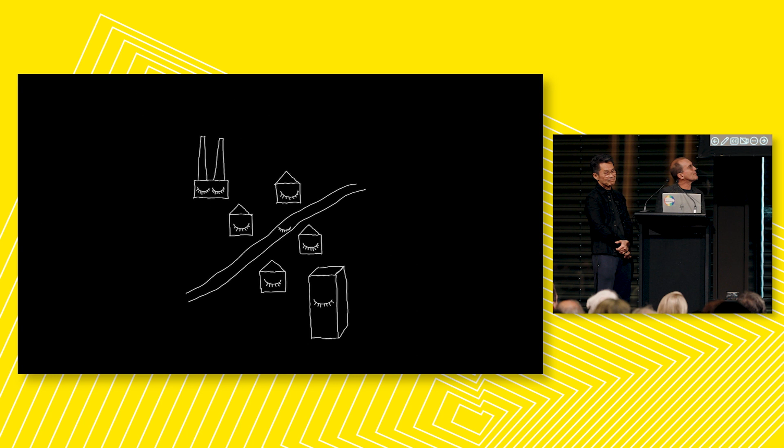So I was trying to do a little sketch, trying to think about what we meant by form follows systems. And so this little cartoon was really that currently we design these beautiful, mainly isolated objects that are really well considered and crafted. But if you imagine an animal in the zoo, it's this amazingly evolved creature, but it's kind of separated.

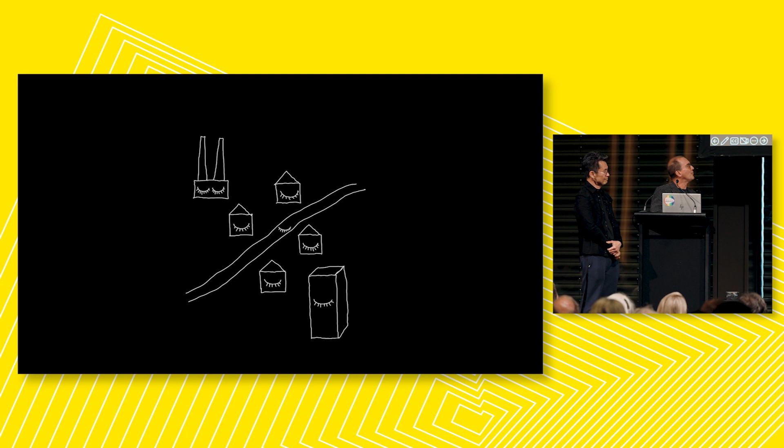And so thinking that can we wake up these buildings so they become a little more active, and then start thinking how we forge these connections between them, and that these connections would start making system effects where we get all kinds of beautiful and wonderful outcomes that are really not through putting more inputs into the system, but just making the system have a lot more feedback loops and a lot more productivity through its relationships.

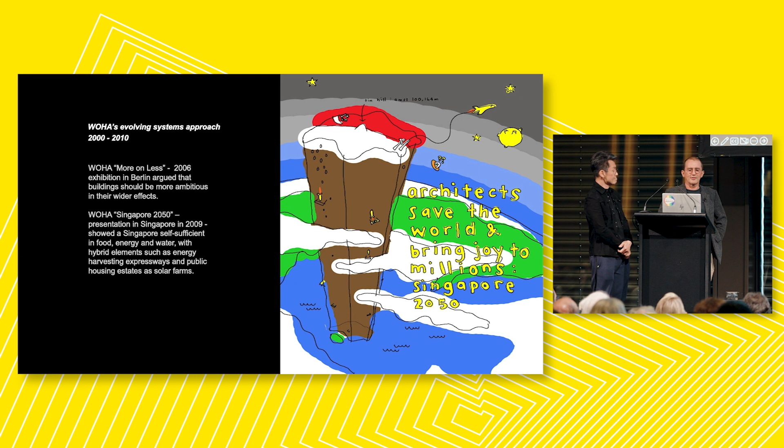So we've evolved this idea since around 2000, and so we've just got a little bit of a history of how we ended up where we've ended up.

So we did an exhibition in Berlin in 2006 called More on Less, which argued that buildings should be more ambitious in their wider effects.

The next one, Singapore 2050, we did in 2009, and that one we led a studio at NUS and then developed our own schemes, thinking how Singapore could be self-sufficient in food, energy, and water.

And Singapore, as a tiny little country where the city covers the island, is particularly susceptible to shocks, outside shocks. And so to us, it's a canary in a coal mine about the way every country is actually going in terms of consuming its resources and running out of space.

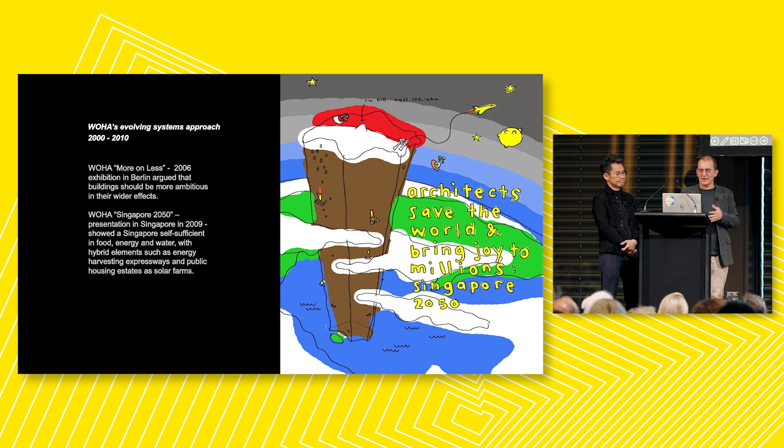In 2011, we had an exhibition at the Deutsches Architekturmuseum, and that was a really good chance to sort of pin up everything we'd ever done and draw some structure and direction out of our practice history. And Germany in particular, being interested in, with their strong green history, were very receptive to our approach.

Following that, we have taught a studio at National University of Singapore for 11 years now, and we basically reran that idea, can Singapore be self-sufficient, year after year, developing more data and more nuanced responses, and have recently started including the economics department, as well as many other domains coming in and thinking how to have this systems effect through the stakeholders we engage as well.

And some of that research ended up in Garden City Megacity, which we presented in Venice in 2016.

So in that book, we posited sort of 5, we thought there were sort of missing measures that could perhaps counteract some of the short-termism and more sort of developer-friendly measures. So in some ways, these were counterbalances to things like facade-to-floor area efficiency or net-to-gross efficiency, and thinking what those efficiencies, which sound very good because they're called efficiencies, but what they were doing to very important aspects of the commons or the performance in nature.

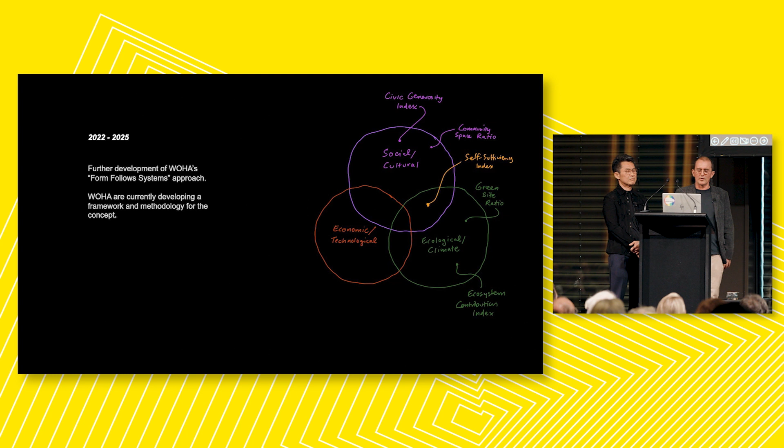And so now what we've been, after Garden City Megacity, we've been thinking how to improve or expand or refine the idea. So we're looking now at sort of more measures that come together that maybe give a more total picture. All of these ones we're figuring out how do you move from this to architectural form.

I think there are a lot of systems which maybe don't appear as form or affect form, but this is sort of hot off the press, so we're still figuring out through our studios and through our own office development.

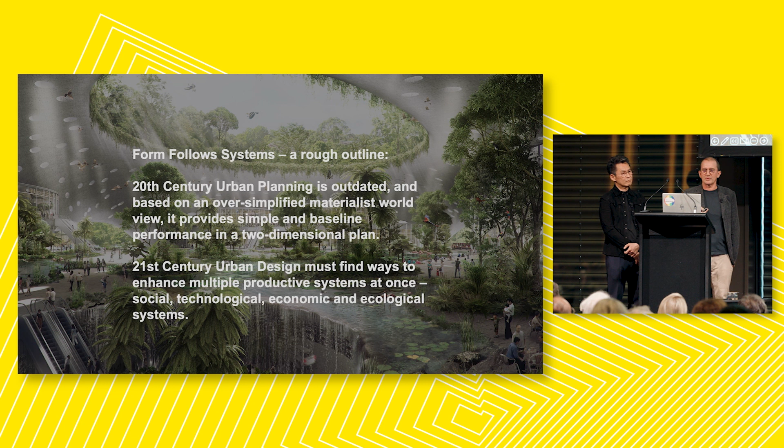A rough outline, we think what this might mean is to first declare that 20th century urban planning is perhaps outdated based on an oversimplified and materialist worldview, and the planning often provides only a simple and baseline performance in 2 dimensions. We think 21st century urban design has to find ways to enhance multiple productive systems at once: social, technological, economic, and ecological systems.

And we realized through this systems thinking that designing relationships between components is just as important as designing the elements themselves. So a bit of a reframing from object to relationship. An analogy is the difference between studying individual plants and animals versus studying an ecosystem.

The great thing about productive systems is they have positive feedback loops which make the whole greater than the sum of the parts. Through systems thinking and systems design, productivity, sustainability, and happiness can be increased by developing these positive feedback loops. These loops in form are really designed relationships that create beneficial loops. The important thing with systems thinking is you get these beneficial effects without putting in more resources. So it's a quality of the system itself, not a quality of spending more on it.

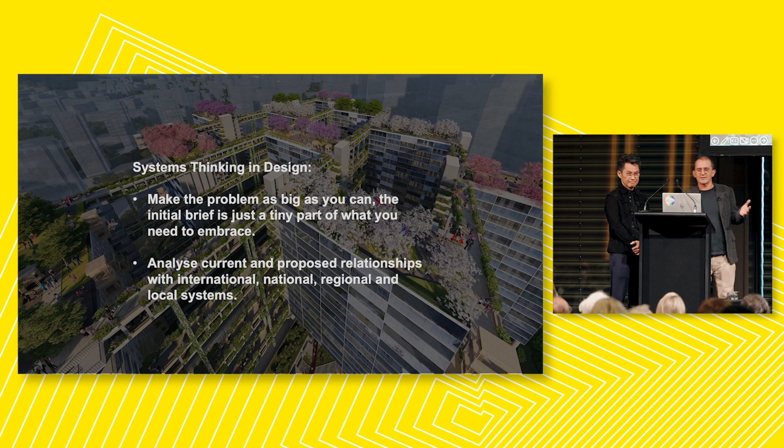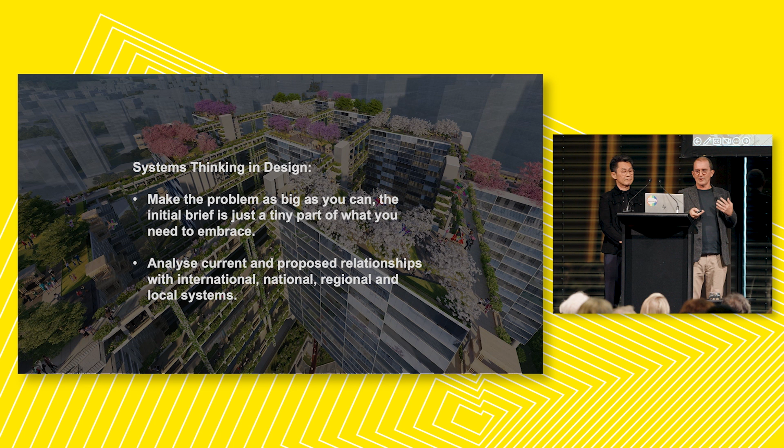So we thought, what does this mean, systems thinking and design? One is to make the problem as big as you can. The initial brief is just a tiny part of what you need to embrace. You analyze current and proposed relationships with international, national, regional, and local systems, understanding development as a change in existing system flows. You look for positive outcomes through improving good relationships and breaking negative ones.

What we always tell our students and everyone is don't assume anyone else has thought of the big picture, because most people work hard to make the problem as small as possible. From a business point of view it's probably the worst possible strategy. But it's really important to break us out of always assuming that the bigger picture is someone else's problem.

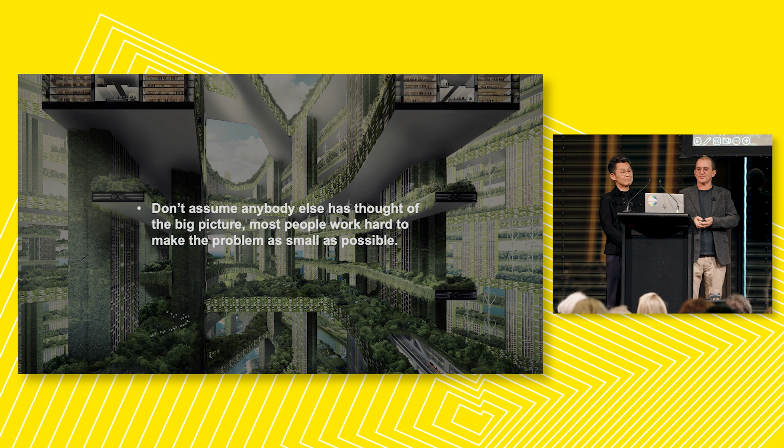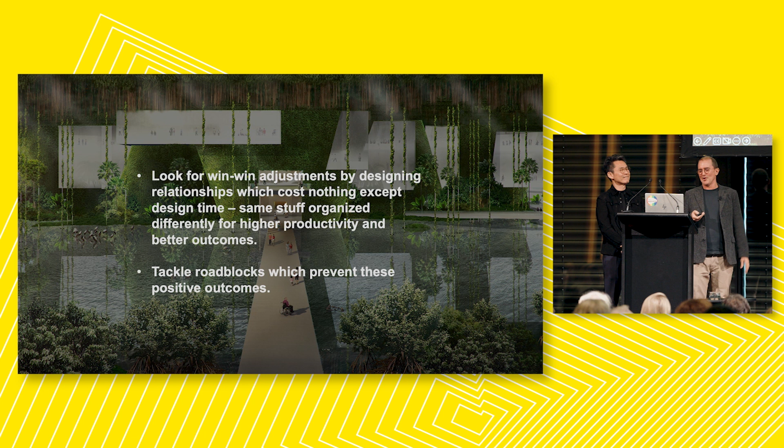What we look for is win-win adjustments by designing relationships which cost nothing except design time. So it's the same stuff, organized differently for higher productivity and better outcomes, and tackle roadblocks which prevent these positive outcomes. We're extremely irritating, I think, often to our clients and the government authorities in terms of being a bit of a bull at a gate, going, why can't we do it? And we fail most of the time, but occasionally we get a win.

Just the concept from Garden City, Megacity, which we still think is very important, is this concept of prototypology. So we try and design every building we do as if it belongs to a regenerative city of the future. Each project is seen as a component within existing systems, affecting them for good. Each project seeks to cause positive ripples that might trigger further positive change, and each project is open to future systems connections.

Mun Summ, over to you.

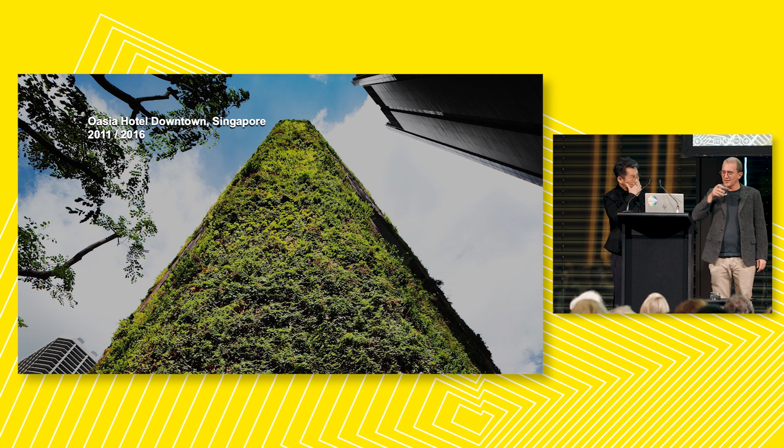So this is a rethinking of the vertical skyscraper. We weren't so concerned about building a habitat for human beings, but we were more concerned about building a habitat for animals and creatures. We have always been very successful in developing horizontal habitats where flying animals and insects could land, but we were not so successful in finding one for climbing animals like squirrels to get to the various habitats. As you can see from this image, it's almost like a tree, and this is the infrastructure for the climbing animals to actually climb and get to the upper levels of the building.

I think we have been very successful, and our general manager of the hotel has told us that every morning on the 10th or 11th floor, the public areas of the hotel, they have spotted squirrels.

This one, is it? The big green one. So it's really a thinking of typology here. And I think what's shocking is that the floor area is quite similar to the one in Carlton. But because we have thought about the negative spaces and the volume that we want to create rather than the floor area, it's sort of ballooned up in a big way. But the good things are explained a little later.

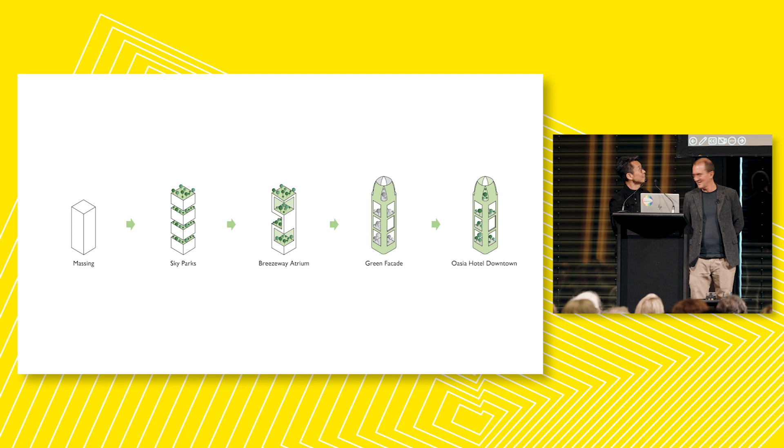Hang on. Okay, so what we managed to do was to be able to do a replacement of more than 10 times the site area, and this has got huge implications.

But before we go into it, this is a simple layout of all the floor plans. It is just an L-shaped plan with the structure all in the corners, and we've been able to rotate it every time each stratum goes up. As you can see from the cross-section, there is a giant transfer structure to support each new ground level that we created.

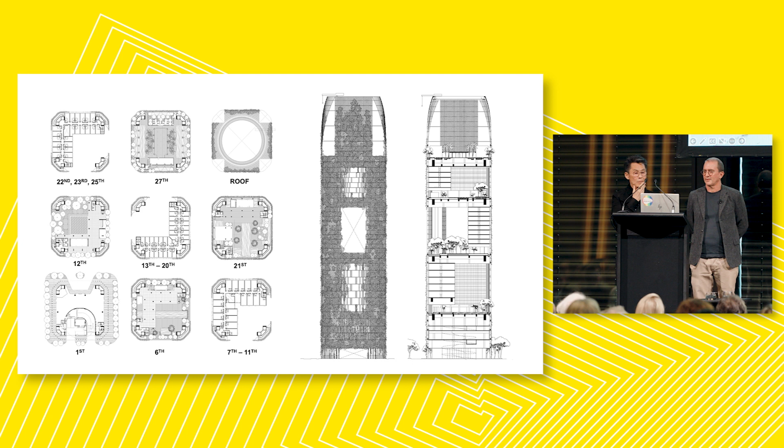What is really interesting is the post-occupation surveys we have conducted, where we're now realizing our buildings have a very different performance and outlook compared to other buildings. When we conducted an energy consumption audit using thermal imaging thermometers, compared to a building that's glass, stone, and steel, the surface temperature is halved. This is how we can actually reduce the urban heat island effect in the city.

Also through the shadowing of the large sky terraces, we're able to reduce energy consumption within the spaces itself through the large shadows that are created.

The other interesting thing we've been doing with all projects is conducting ecosystem services measures, which are projected as well as measured. Compared against a pristine lowland rainforest, which is what Singapore used to be, this hotel development performs somewhat between 25 to 30% of the lowland rainforest in doing things like regulating air quality, something essential for the survival of our human species. The air we breathe in is oxygen, so the building here actually performs the responsibility of converting carbon dioxide into oxygen. This is something I think we can demand a lot more of our buildings, that it performs ecosystem services for us and for the planet.

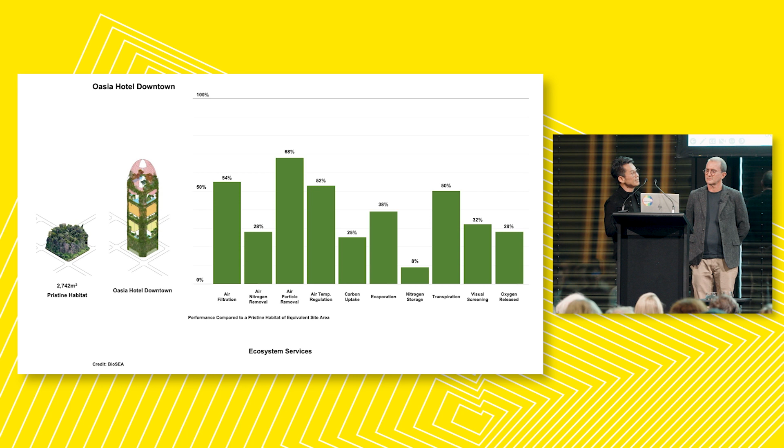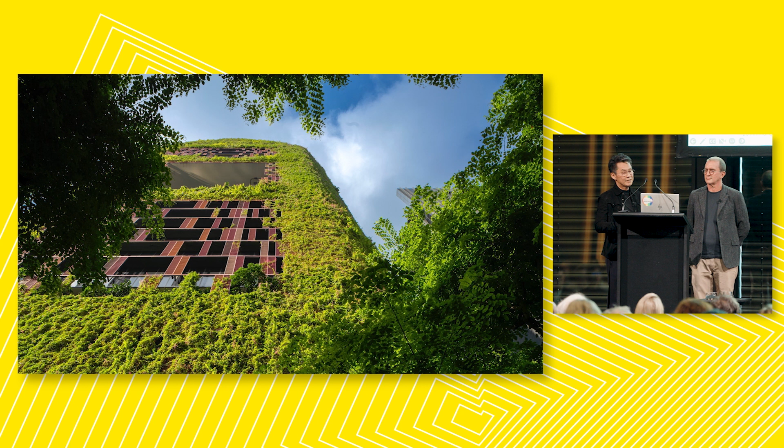What is really heartening is that this green facade, being placed next to a neighborhood park, because it's side by side with it, animals were able to hop onto it. When we did the biodiversity survey, it has roughly the same amount of animal species as the linear park on ground level nearby. This is something that's very heartening.

We have received quite a lot of feedback that people enjoy seeing this building, seeing how it changes day by day. Sometimes they're flowering, sometimes it's actually waving when the wind is blowing against it. So we do get very positive feedback on this particular building.

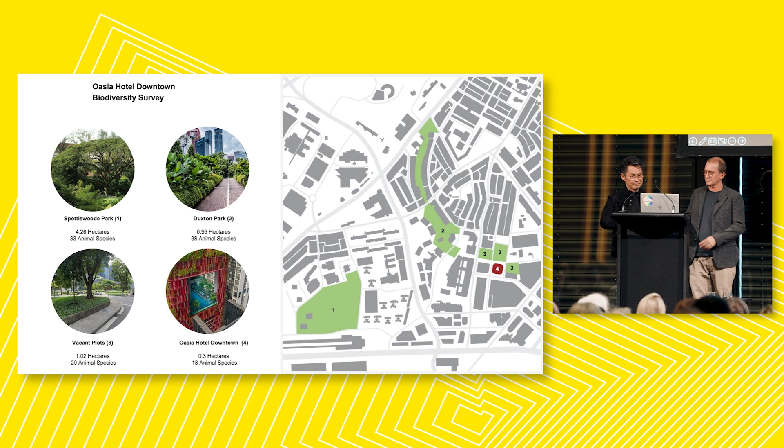So the next project we're sharing is a public housing project, Skyville at Dawson.

We're really pleased to have done this project, because often what we show people, they say yes, but it looks very expensive, it doesn't look affordable. This was done on a really affordable budget in Singapore, at the time around 1,600 a square metre, which would probably be quite a bit more now. In fact, we were penalised because we were able to precast every single thing in this building, and it went 15% below budget, and our fees were based on percentage. Yes, so they clawed back fees from us after it went out for tender.

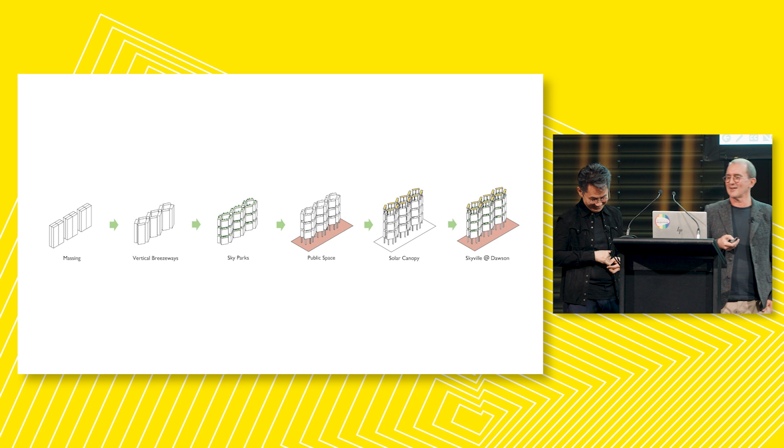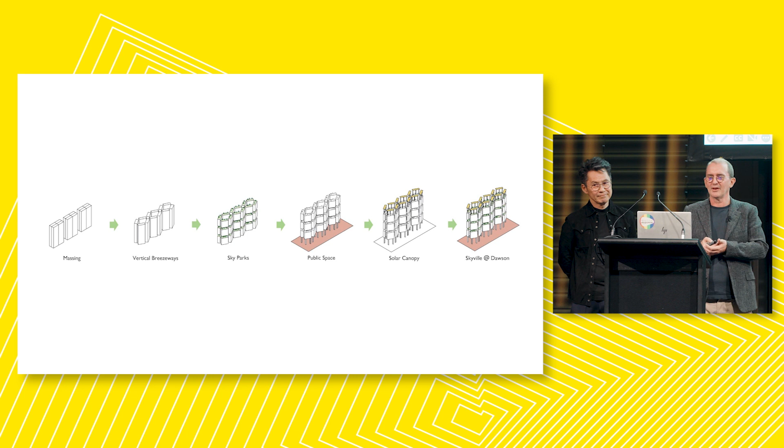These are the basic strategies, thinking about community and systems, the whole and the parts. It's very large, 960 houses. If we looked at the massing using a typical plan, it would create quite a wall of buildings. We thought, how do you ever get to know 960 families as a neighbour? You just sort of want to give up at the very thought of it. So the initial strategy was, how do we create community within it?

At the same time, we wanted these strategies to perform environmental services as well. So we thought it was interesting to open up the blocks to create vertical breezeways inside, slicing it up horizontally into sky parks. We have these social spaces, because I think all human interaction happens on the horizontal, and the more you can develop horizontal spaces, the more natural social interaction you get, so we could roll out public space throughout the project.

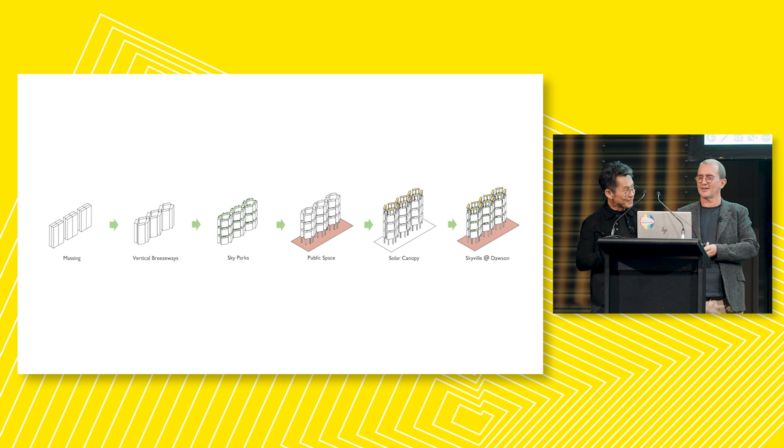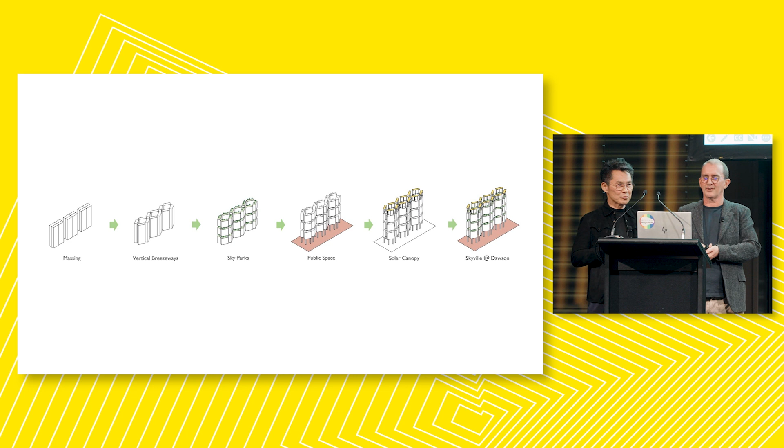One thing that was quite instrumental in the thinking was that when we were designing this, it was at a time after 9/11, where we felt it was necessary, if we were to do a very large building, a mega structure, to find multiple ways of actually moving around in it, not only horizontally, but in a sort of snake and ladder manner within the development.

Depending on the country, having multiple exits and being able to run in every direction would be a security nightmare, but Singapore is super safe, so it's not a problem. The outcome is that I could always walk a few floors up or down to visit my friends, and that's the impact of this development.

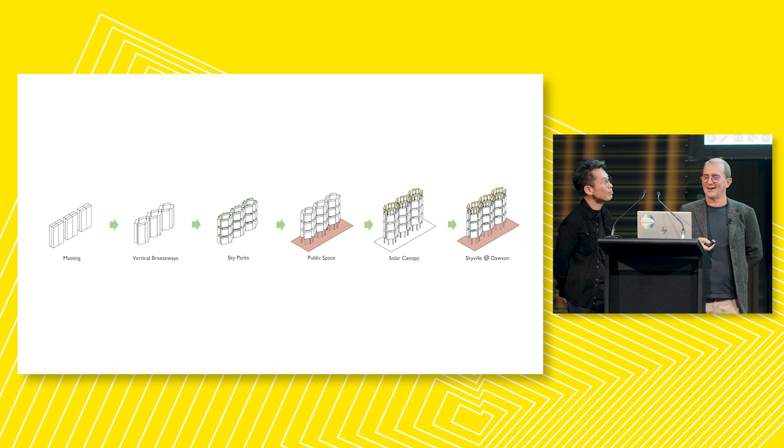And then at the top, the solar canopy, and those things all come together. So in a way, the form of the building is this strategic diagram of relationships.

It also has a public park, along an existing linear park. So it has a town plaza, childcare, and things along the ground plane, so it interacts with the neighbourhood in a very welcoming way. And as you go up, across the total site, we have internal playgrounds and sports fields as well, which are very well used, preserving the existing trees.

One of the justifications we had for going high rise and high density was that there was a realignment of the road. The road in front of the development was expunged so it has a larger parcel, but we felt it was necessary to keep these mature rain trees. We felt that needed to take priority over spreading the buildings across the entire site, because we wanted the building, when completed, to have a very mature park for people to enjoy.

And then this idea is a sort of community living room, so the letterboxes are placed here, and it's almost like a garden pavilion or pergola that looks out over the park.

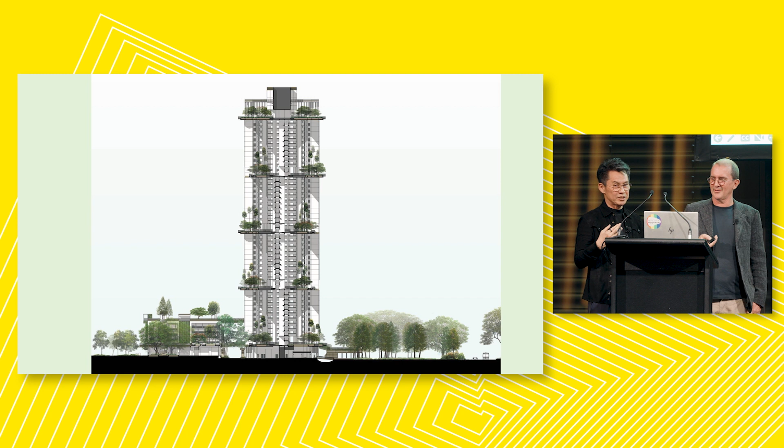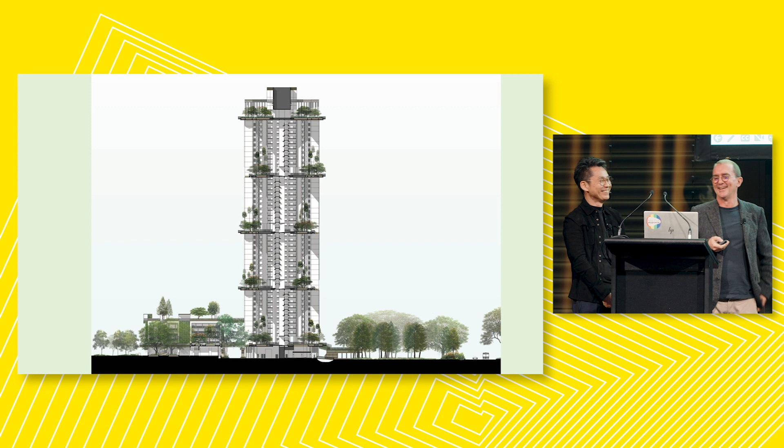And that was the crucial one, where I said you could actually recognize and hear someone down there. That was the visual and audio distance that we would be able to extend, and what would be the maximum.

And the roof is actually, we called it penthouse for the people. So rather than the richest guy getting the penthouse, in this case, everyone could come up. And it's now become a very popular place to watch the sunset for the neighborhood, and like National Day fireworks. It tends to have a lot of picnics and things.

But it backfired on us too, because it appeared in Parliament as a nuisance complaint, that too many people were actually coming up to this level, and that people living in this were saying that it's actually my terrace, but it's actually public housing in Singapore. Everyone owns it. So, I think this is the NIMBY, not in my backyard syndrome, that is causing some unhappiness.

But we had some good results from our post-occupation survey. Reduction in energy bills, with the open cross ventilation and the vertical breezeways, we had 5% less use of air conditioning.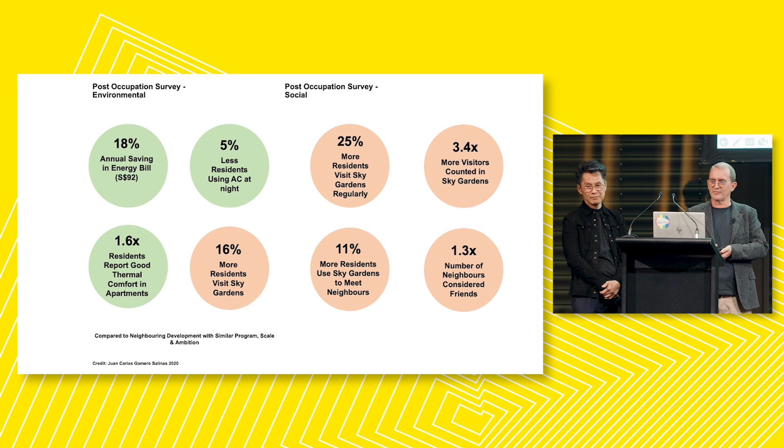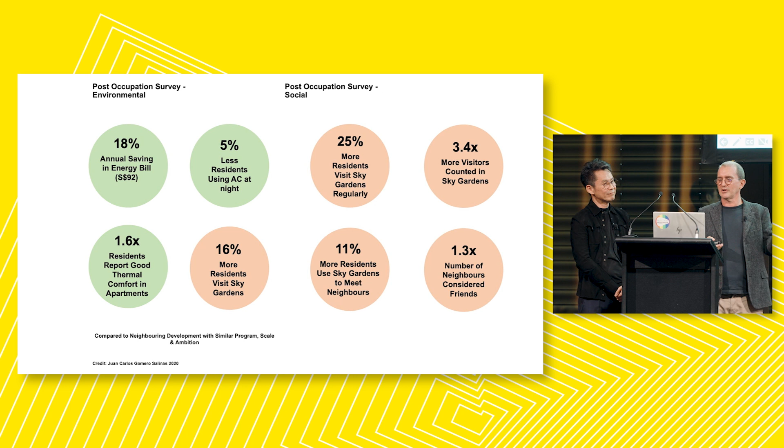Greater satisfaction with the thermal comfort. But I think the really key ones are the community ones: 1.3 times the number of neighbours considered friends. And for us, that was really the most critical one, because we just speculated with the design that we were designing for sociability, but it was really good to get confirmation in the data that it actually is a more sociable building.

No doubt this residential complex is quite big scale. It's like a concrete jungle, but at the same time, it is quite small scale in the sense that the units are actually housed within certain villages. They're actually connected by all these intermediate sky gardens. It makes us want to not just stay within our homes, but really to spend some time outside to just interact and bond with one another.

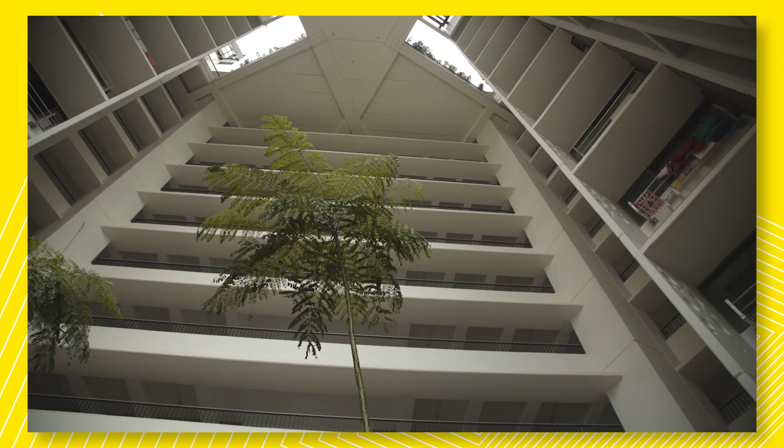I think with all this being presented together, it increases the chance for interaction and also engaging the neighbor and the people around you. That's something that's lacking in many parts of Singapore where you're just purely living in an urban jungle.

The idea of this building is trying to make it like a kampong style where you really try to meet up with each other. When it's getting quite late in the night, it's actually very quiet. And the wind is good. So we can have our dinners while enjoying the view over there. That makes it a perfect place for us to communicate and then to socialize among other neighbors.

Kampung Admiralty is a project we actually designed while we were developing those 5 measures, and so it was very self-consciously designed to score highly in them. It was a government project for a neighbourhood cluster of government services, medical, social housing, commercial and community.

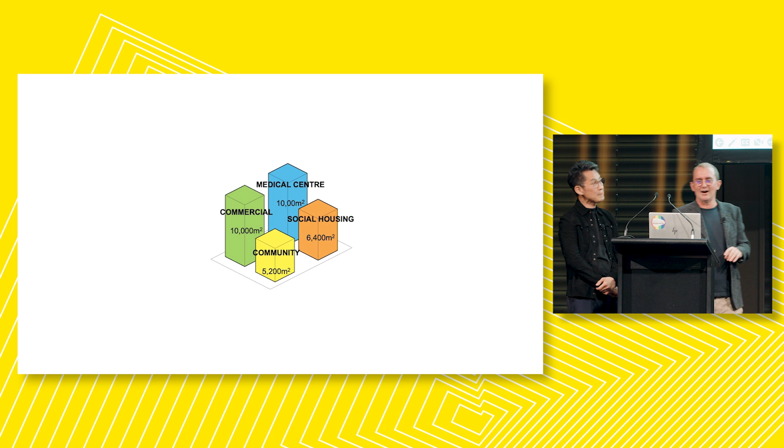But we actually had 7 ministries we had to deal with that were involved in all these elements. And so the initial brief was to keep them all separate, so each one was less complicated, and they were just going to be convenient in that they were co-located, but there wasn't much interaction between them.

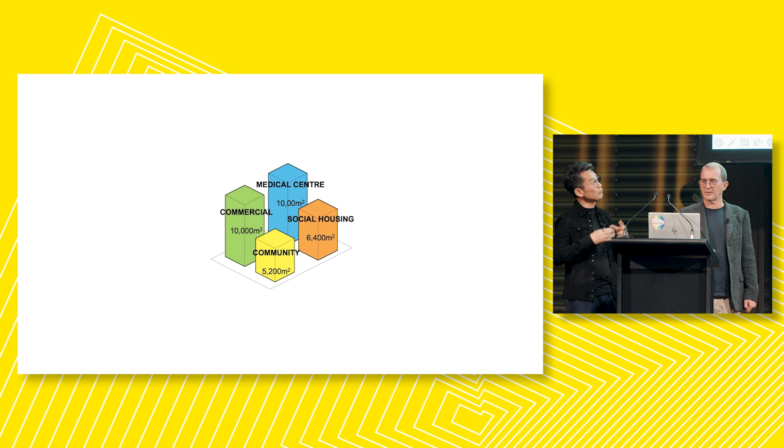But the key component is really the social housing for elderlies, and this is something that Singapore is actually quite concerned about, testing out quite a few experiments about how to handle elderly living in Singapore. This was intended to be an integrated development where the elderly housing together with the medical center would make a very good synergy where you don't just treat the elderly, but you keep them active and healthy. And I think that was the whole purpose of it.

And I think when we understood this brief, we did certain things like we wanted the elderly here to be very active and to be able to walk around in the building, to go to the urban farm on the highest level, and also at the same time to be connected by the metro back to the city itself.

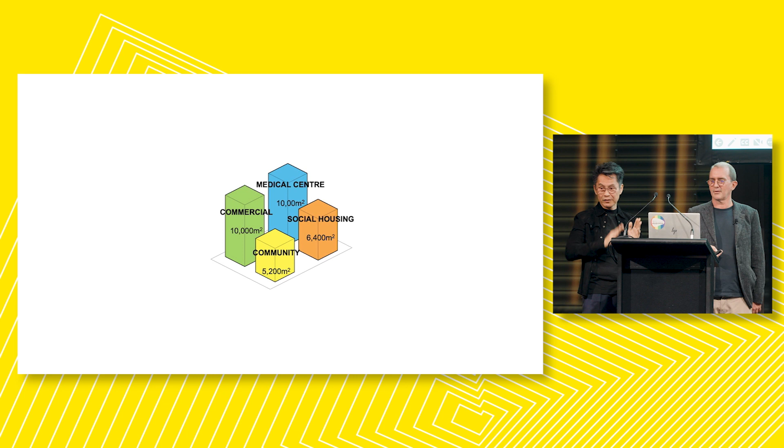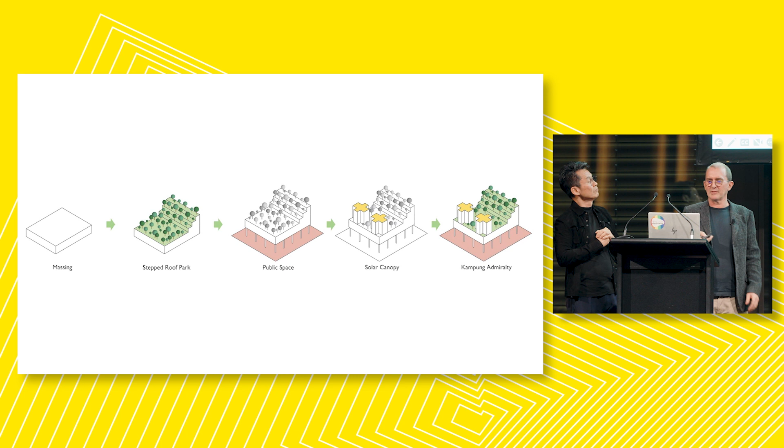So instead of separate buildings, our idea here was to make a kind of club sandwich or layer cake, whereby playing up on that horizontal connection, creating a lot of social spaces horizontally, and reorganizing the elements, we could release some essentially free benefits, if you remember the systems thinking idea.

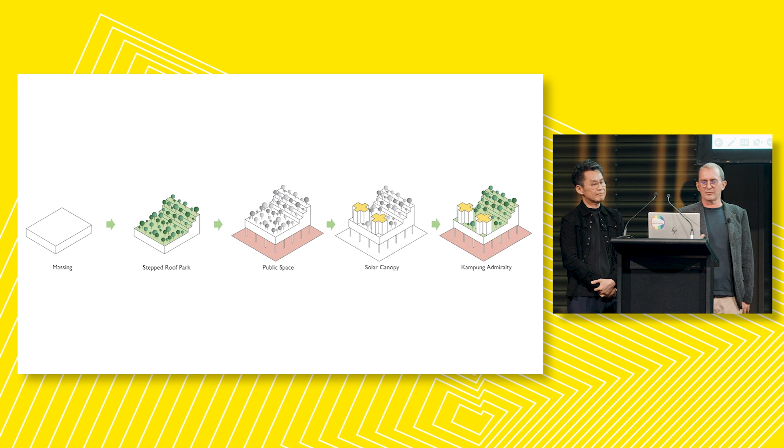And so we basically reconfigured the medical center and the childcare and elder care and the retail in such a way to release major new spaces such as the public space under the building, and the public park on the top.

And so in the end, we have a really interesting situation where although the elderly housing is extremely convenient in that it's located over a lot of public services, it actually sits within a beautiful green park, and they have a community garden that they can get involved in right at their doorstep. But at the same time, there's a very vibrant public space on the ground level for the entire community.

So this is a section, and this is where we stack the layers. As we mentioned, it was a club sandwich approach. We had the services in the subterranean. The ground floor is really a very public thoroughfare where it connects the neighborhood to the MRT, and it also has some commercial component.

The second floor is what we have called the food court in Singapore, the hawker center, which is actually subsidized food for most Singaporeans, and it looks over the living room of the community. The third and fourth floor is the largest footprint, where we use it as the shade and shelter for the public plaza, where it can operate all around the year, rain and shine, and also as a support system for the entire landscaping that goes on top of it. And then we have a very safe and secure environment for the elderly housing above.

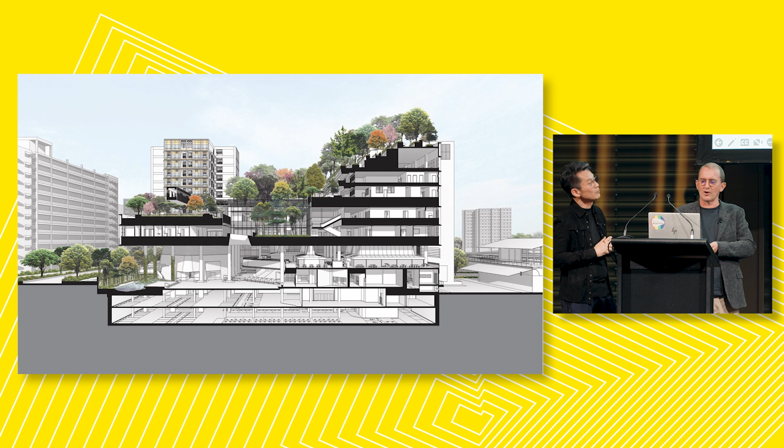And these are not just social spaces, but once again, we use them to perform environmental services. In this case, we have quite a complex water treatment and recycling system that runs through it. So in addition to being a public amenity, it's purifying and cycling the water around it.

But what is interesting about this section is the fact that we also conducted, well, not us, but SUTD, which is another university in Singapore, conducted an analysis of this integrated development, whether it was actually successful or not. What they found, using very advanced Bluetooth technology, where they could map the movement of people within the building, is that a lot of the elderly people who live in the apartments here never actually touch the ground.

They would move horizontally, or down to the 6th floor where the park is, enjoy the park and go up to the community farm, or they will go down to the 4th and 5th, 3rd and 4th floor where the medical center is, or at the lowest, they go to the food center, the hawker center, to get food. And for one week, they may not come down to the ground level.

So this idea of a vertical city was verified, and as a potential further development in Singapore, we were trying to do it high density, high amenity.

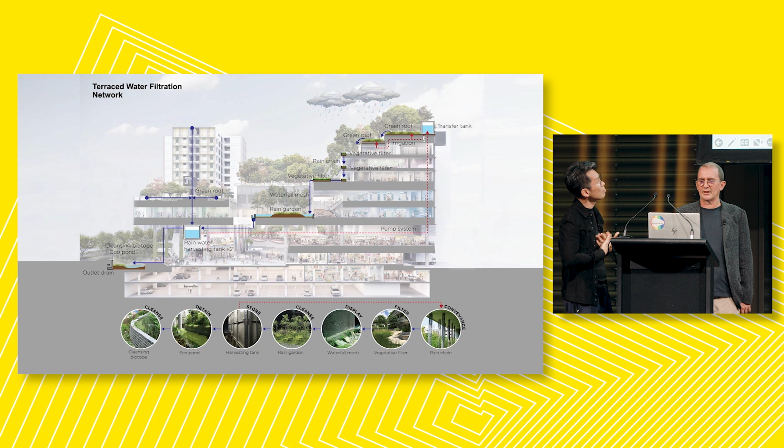And I think it's something so ingrained in us that amenity happens on the ground. Your first reaction is, is that good or not? But I think in the end, what it does is mean we can actually choose how much amenity we want, almost without restriction. If you build it, they will come, kind of thing. So then the question is, how much do you want, rather than how much do we have left over, or how many more people can we squeeze into the existing amenity?

So this is the waiting reception area of the medical center, and we felt it was necessary to make it not feel like a medical facility. In fact, you have daycare, you have day surgery here, and that glass panel there is actually a one-way glass. The recovery is behind that. You look into this cocoon landscape area so that you could actually recover quicker. And this actually proved to be very successful within the medical center, and we've been told they would like to adopt this layout and furniture in other medical centers as well.

And the idea here, because in Singapore, the elderly are quite scared of hospitals. They feel like they'll check in and they'll never check out. And you saw, I think, the news in Hong Kong with COVID, that a lot of people resisted getting vaccinated and treatment just because they have a deep suspicion about doctors and hospitals. So the idea here was that it felt like a kind of mid-century living room that they would feel comfortable with and think of as a welcoming living space. And then the staff actually just encouraged them to come here because it's air conditioned and relaxing, and then suggest they get their eyes tested or their blood pressure checked.

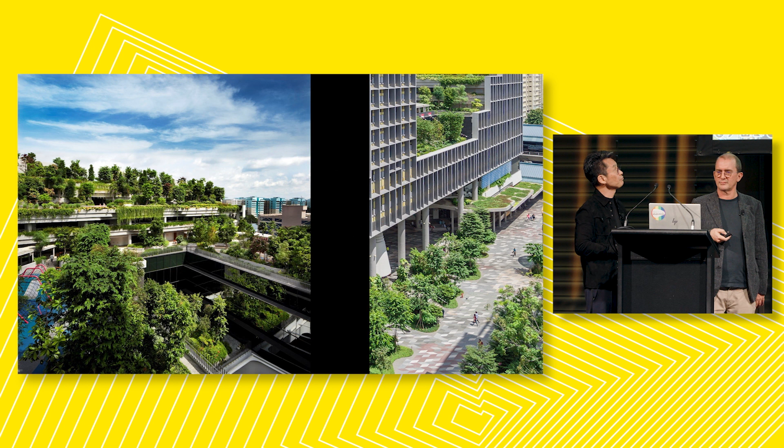I think it's an interesting rooftop elevation, that idea of multiple ground planes and a green city full of amenity can be achieved on top of quite a big building. This was actually taken one to two months after completion. If we took the picture again, it would be entirely covered with tree canopy. But one important thing is that if it's entirely covered in tree canopy, the sun doesn't get to the building, so the building remains very cool. Again, another example of how we handle urban heat island effect within our buildings in the city.

Just, Simon, I think we're one slide out on the screen to the laptop.

We did a post-occupancy survey of the biodiversity, and this was one of the first landscapes we'd actually worked with our landscape architects on to consciously design for biodiversity, and it was really very successful. We ended up with more species on our roof than there were in the neighbourhood park, which was a great and clear example that it's just a choice of specification. It's the same budget, same area of landscaping, but designed for higher productivity through choice of species.

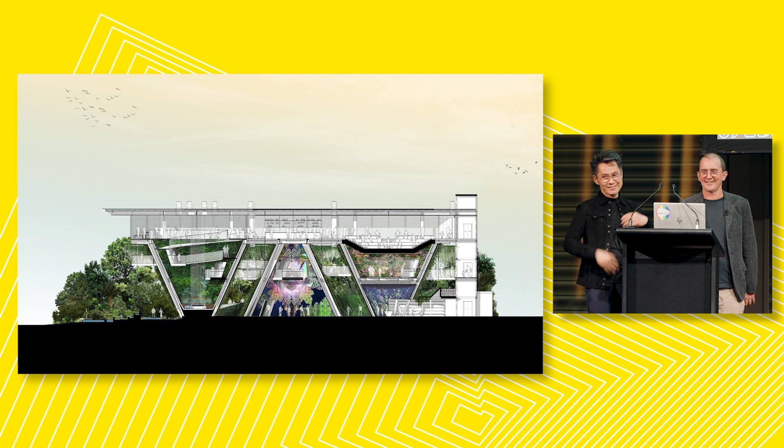Here we tackled the last remaining surface with a planted ceiling, just to round it off. This sums up our approach in a very small building, where we tried to create a very immersive three-dimensional garden, the floor, the walls, and the ceiling all green, and then create a new ground level that floats above this landscape, topped by a solar canopy that makes it a zero energy and zero water pavilion.

As you can see the layers, one thing we did was to limit the amount of building on the ground level. It only occupies 50% of the land. This is something we're developing as a new strategy - if we ever do a new development, we will only want to occupy 50% of the land, to create as much area as possible for landscaping and planting.

We were able to demonstrate this in the pavilion, with a floating gallery connecting all the structure, the thematic cones of this pavilion. And as it goes up, there's the sky market, and above that, the solar canopy.

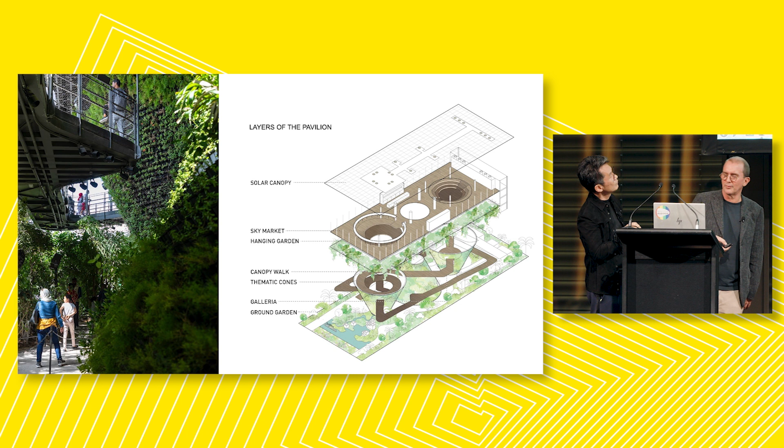It was an unusual pavilion in Dubai because it was totally not air-conditioned in the main spaces, really using evaporative cooling together with radiant cooling from the plants to create a comfortable atmosphere. We understood that plants photosynthesize best at a preferred temperature of between 10 to 30 degrees - that's the optimum. Anything above 40 degrees, which is usually the case in Dubai, the plants stop photosynthesizing. So the design was really to create a sheltered environment for the landscape to thrive.

We were able to bring the temperature down by 6 to 10 degrees so the plants could photosynthesize, and when they photosynthesize, they were able to cool further through evapotranspiration, eventually creating a 6 to 10 degree reduction in temperature in the pavilion compared to outside.

A really nice story was that a family of doves moved in almost immediately and raised three sets of babies over the 6 months.

You can see we created a new dimension with the ceiling, also green, through pots hanging down from the ceiling, able to indirectly provide energy for the plants through grow lights without the heat. If we'd had the heat directly, the plants would not survive, but because it gave energy without the heat, the plants were able to thrive.

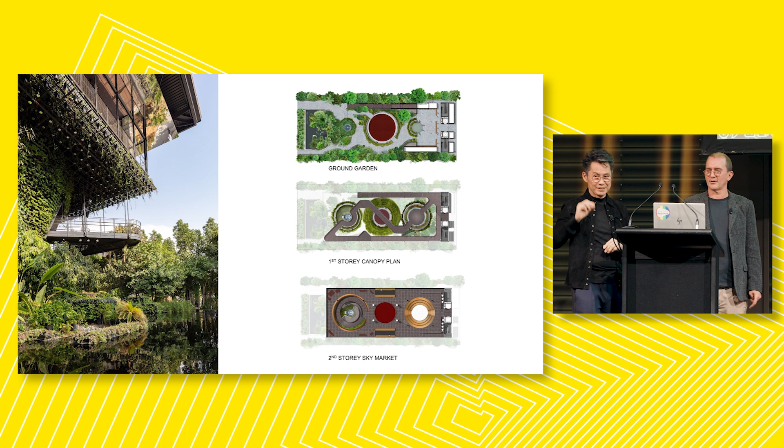Just back on that one. So you see in the top left is the evaporative cooling. These are not a new device, but we've been working with Transsolar out of Munich and a Singapore contractor to create a next generation one so they can guarantee all the water has evaporated within 1 meter of the fan. So it's totally dry, but still provides the cooling.

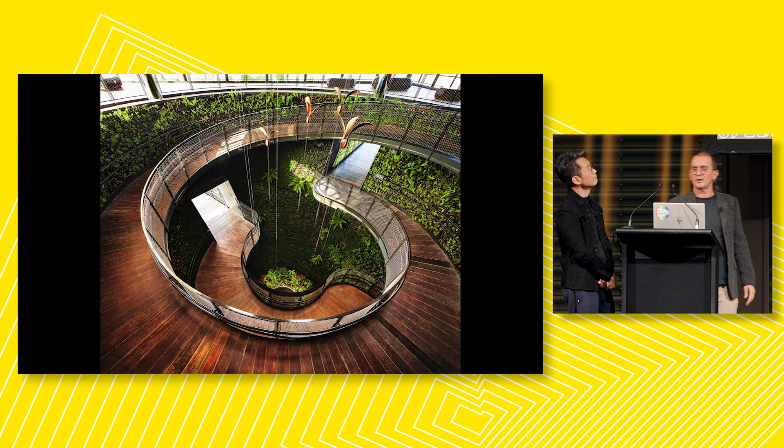There's some of the internal views. Sky market as the new ground level. This was the sort of data that we got out of it, and we were able to actually have a green replacement of 170%. Almost 80,000 plants were actually used in this pavilion. The energy consumption is 100% provided for with the solar panel, and the water is actually, through the solar panel, desalination of groundwater, and that we were able to reduce by 6 to 10 degrees.

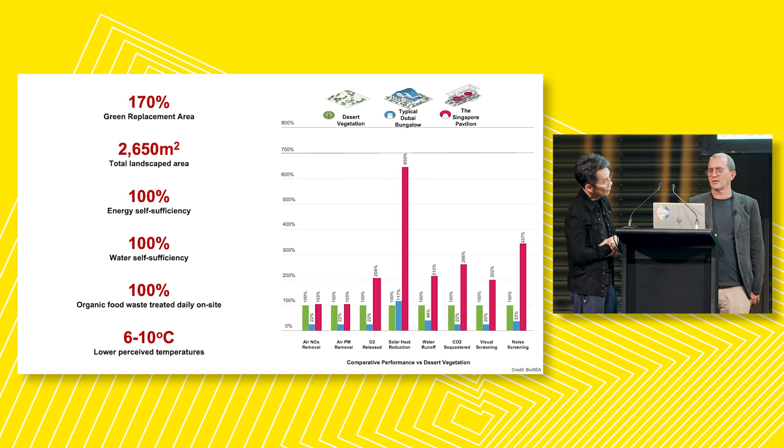But what is really quite interesting is the sort of ecosystem services that this pavilion provided as compared to the sort of natural desert vegetation. You can see the red bar is the Singapore Pavilion overshoots compared to the natural habitat, as well as some of the detached single family homes in Dubai.

What we actually set out to do was to study whether we can think of an alternative typology for the desert area, and we feel we came quite close to a solution, and we are now actively trying to find ways to realize some of these ideas in the desert area. If you imagine a whole neighborhood performing at this level, it would quite transform outdoor comfort in the neighborhood.

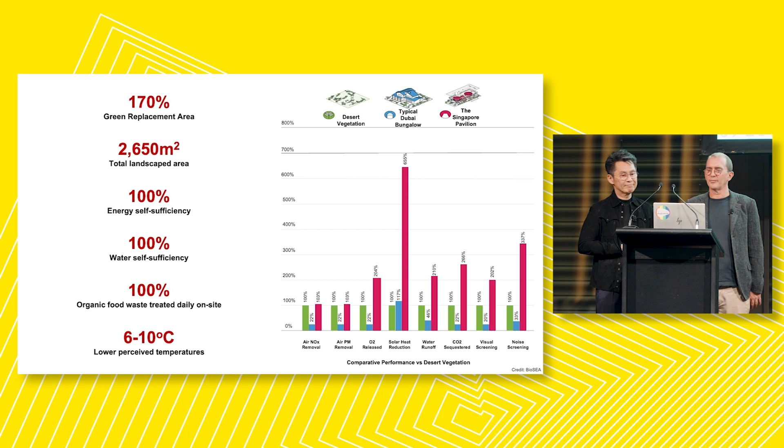But this was really a reaction to the land scarcity in Singapore, where we are trying to find ways to actually create land and create real estate. And here we have actually replicated ground levels 3 times vertically.

And because we wanted to make this a total Singapore experience, we actually had at the arrival a lowland rainforest feel to it, an experience. On the 5th floor, where the hotel guest rooms start, we actually have a beach with coconut trees and palms in it, all full package.

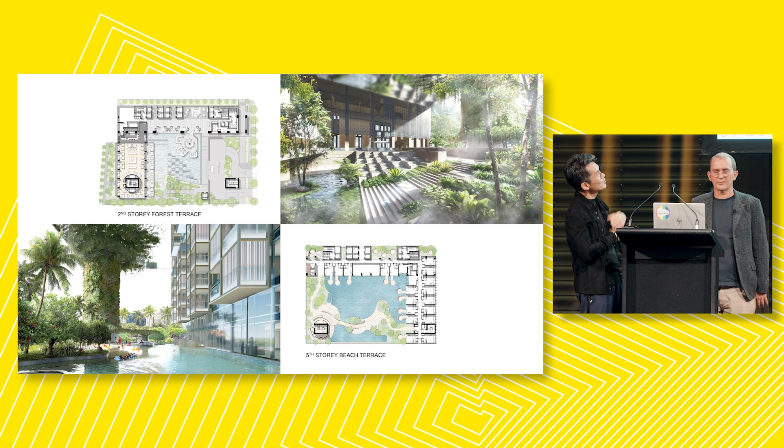Then as it goes into the next terrace, we have the botanical gardens, where you could have weddings, and you could actually have a ceremony, and that sort of mimics it. But what's interesting is that it's covered, but you can actually have the functions throughout the year. Then at the very top terrace, we call it the Cloud Terrace, which is the highest level, where it's the experience you get when you're in sort of high-rise buildings.

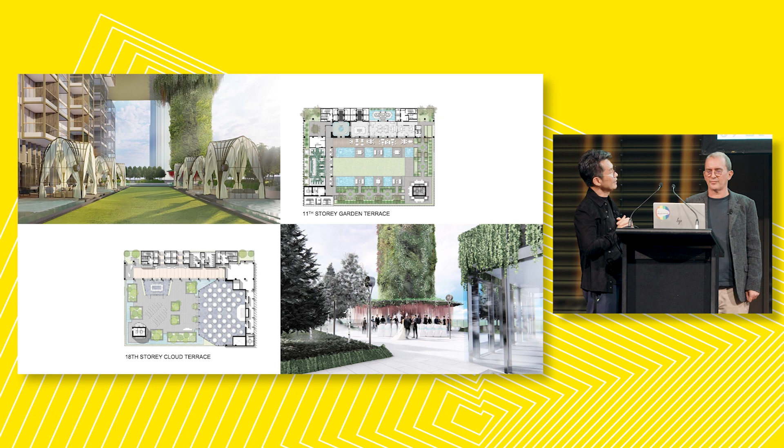The idea was actually to be able to do the ballroom at the top, something that was not the normal solution in the hotels in Orchard Road, and we wanted people to be able to have a wedding in the clouds. It's almost finishing, but this was 1-2 months back. And the ceilings are all mirrors, so when you look up, you will see a beach, a forest, and a cloud, with people swimming around on the ceiling, so it should be quite fun. But the very top, the same footprint of the building, is a solar canopy as well.

Another project which has been a long time coming is in Bangladesh, the BRAC University. This is a very interesting client, an NGO who actually delivers a lot of the Bill and Melinda Gates Foundation work through India, Asia, and Africa. So when they were building a campus for their university, they were on board to try and make it as high-performing as possible from a sustainability point of view.

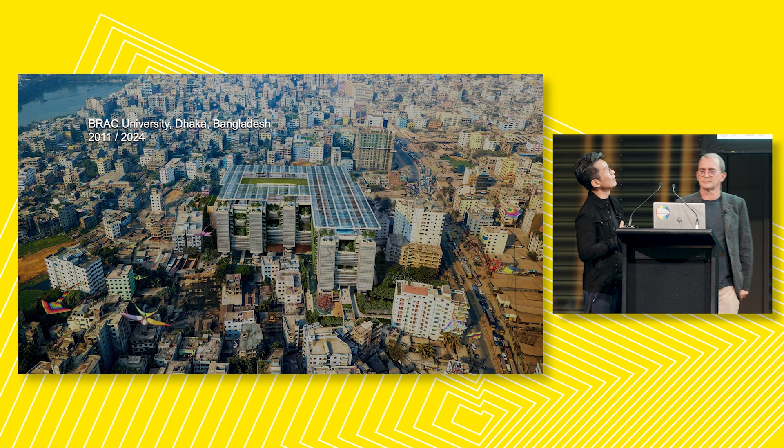This is somewhat based on the horizontal breezeway stacked typology that we created for the Singapore Art School, built almost 15 years ago. When we got this opportunity of this mid-rise, high density, but high amenity university, we adopted this model, and it was actually a better climate than in Singapore, with mild temperatures throughout the year. Through the wind funnels created by the horizontal breezeway, we could have most of the academic spaces naturally ventilated, but only in the summer months there is a hybrid system, which we also collaborated with Transsolar to create, where it's actually cool air but with elevated wind speed in an enclosed environment.

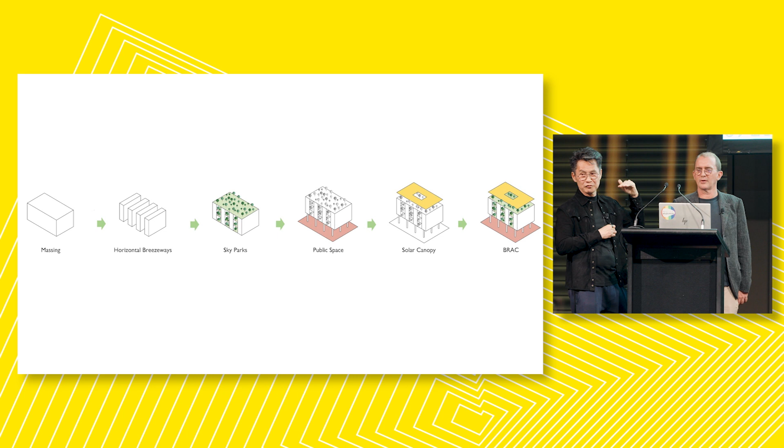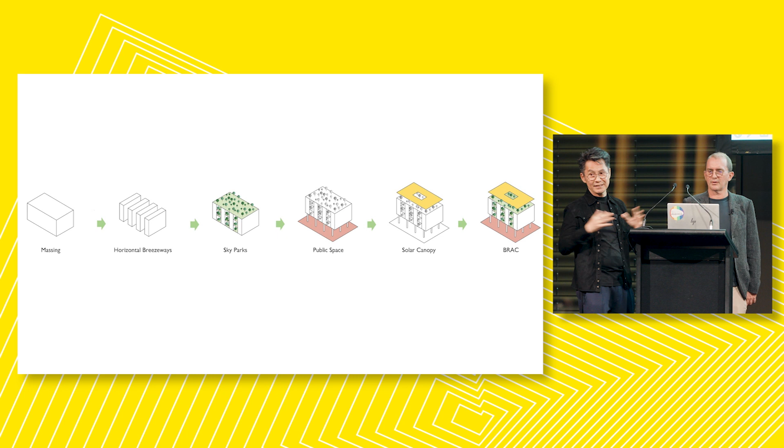But most of the interaction and social spaces in between the academic spaces is a naturally ventilated breezeway. As you can see, we have this stratum where we created a lot of intermediate sky gardens and park levels. The most important one is at the very top, where we actually have a recreational field, a solar canopy, and swimming pools for the university. So whatever happens on most university ground levels, we actually packed it up into a super dense development.

At the same time, although it's very dense, we were really keen for it to be a meeting place for the neighbourhood. The site was actually a toxic waste dump, filled with black water bubbling with hydrogen sulfide, and that was the only reason it was available—no one dared even put their foot in it. So the idea is to turn that into public space, or a mix of public and university space. The university floats above, but it creates a kind of civic experience which is really lacking in the area, which is really just big, crowded roads and developments built up to the boundary.

So this is the lower stratum, where it actually is an interface between the public and the university. The intent is for the ground level to be accessible by the public. The BRAC has bought into the whole idea of providing public space for the community, and we felt it was actually very necessary for the BRAC organization to also handle some of the needs of the community, like healthcare. So there is a clinic within this development that actually reaches out to the community.

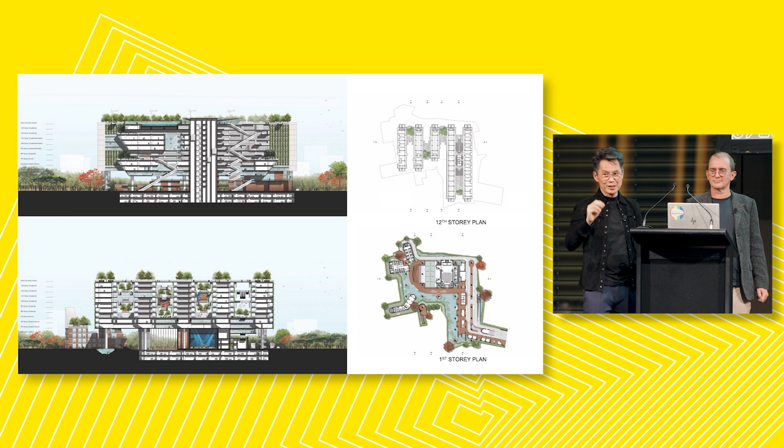The larger facilities, the lecture theaters, help funnel the wind into these horizontal breezeways, which enables very effective cross-ventilation within the academic spaces. This was also verified by Transsolar in the School of Arts in Singapore, where the classrooms have got actually a higher oxygen level because of the effective cross-ventilation compared to classrooms in schools that are actually on the ground level.

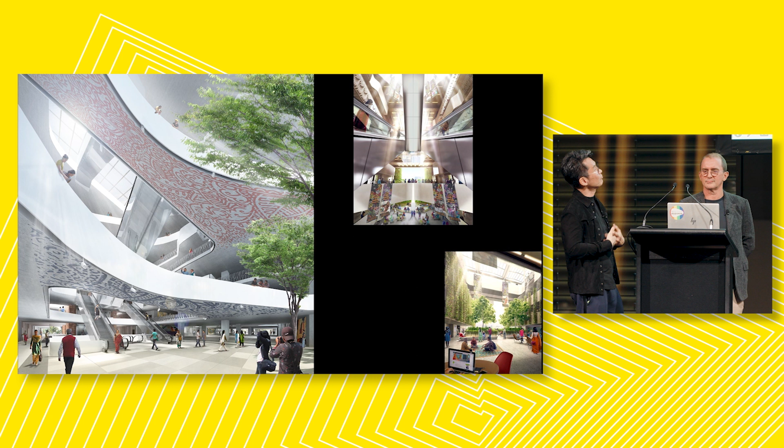It is always so hard in Singapore because of the buy-in by the state for providing the full package or system layered together. But the very fact that you do not get very reliable energy in Dhaka meant the university was very keen to actually provide it themselves, so that their computers and laptops would run continuously. And so this was something that I think worked in our favor.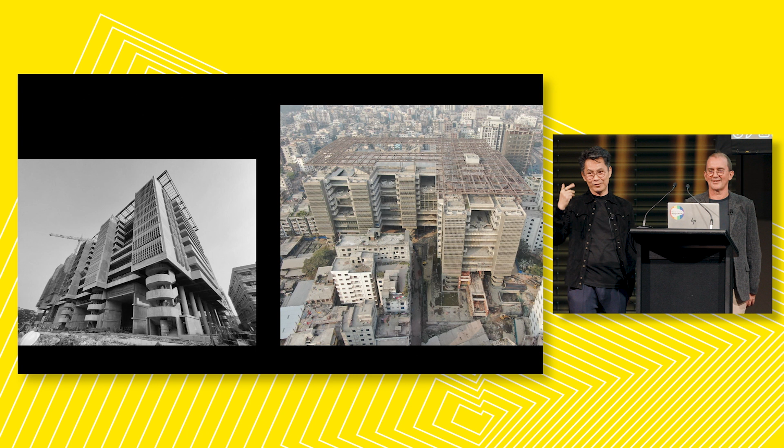We're getting close to the end, I think. Yes. So, we will do this very quickly.

This is one of our sad stories—our very recent project where we wanted to drive ambition in public projects, but unfortunately the state did not share our same ambition. We created a carbon negative headquarters for the sustainability ministry. Shocking, isn't it? But it's 100,000 of office space, and we were able to actually make this an energy positive building.

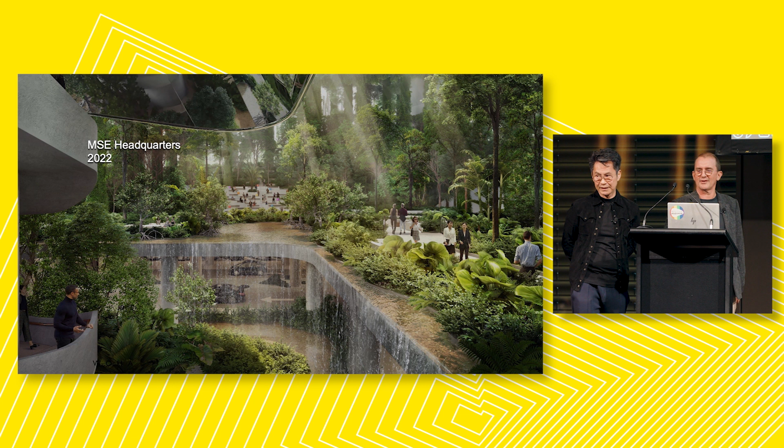So the way we did it was, instead of building a tower on a podium, we actually optimized and maximized the surface area so that we could have solar harvesting facilities on it. On the vertical surfaces, we actually had a layer of vertical solar PV panels, and behind it is a layer of green that enhances the performance of the solar panels.

Likewise, we did it on the roof, but yet at the same time, we're able to create a donut, a courtyard that allows a lot of light to come in, but create a very biocentric environment inside that also creates a new kind of work environment for the ministry.

So the arrival is not a drop-off, but it's actually a public space, a park for the community. And yet we had this funnel, which is actually the lift core, but it's a big funnel that reflects light into this entire atrium space, and it also catches the wind from ground level, and we have a device at the top called the solar chimney, that helps draw hot air out of the space as well.

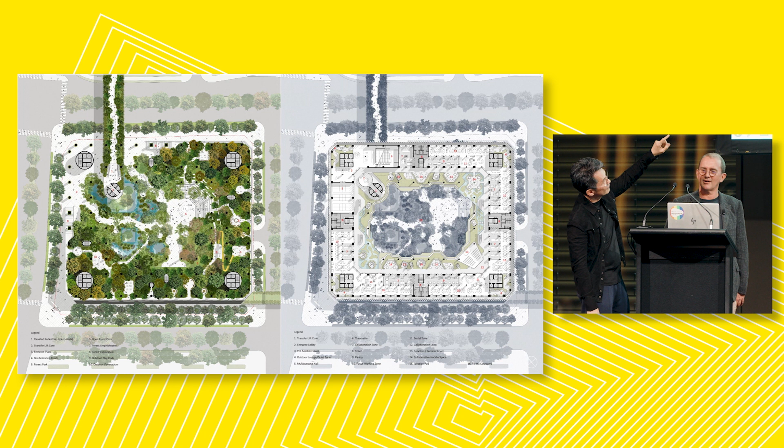So that's the ground level plan, and that's a typical floor plan of the offices. Almost 40% of the office space, social space, and workspaces are designed not to be air conditioned, but naturally ventilated and cooled by the landscaping.

Yeah, so that's a view of an office environment. But I think it proved to be too daunting for the ministry, because they look at this image and say, who's going to maintain this? A little disappointing. We've done a series of competitions where we really hit the objectives, and they chicken out a little bit at the end.

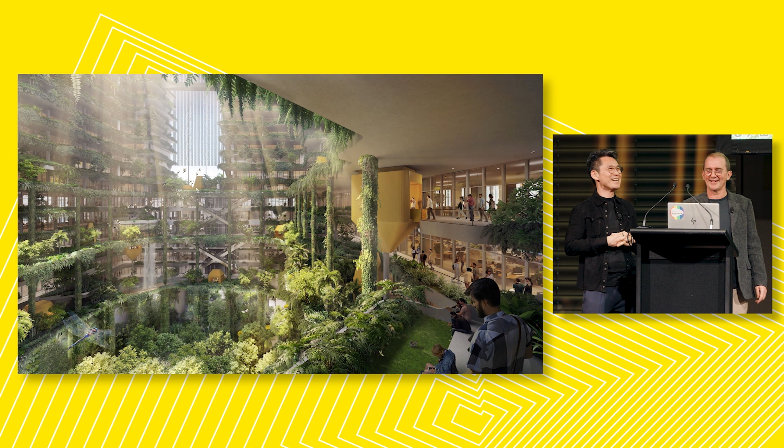Last year was a bad year for us. We took part in 2 competitions. We were so sure we had the best possible result, including a food master plan in Singapore where we demonstrated Singapore can actually get to food self-sufficiency. But again, we overshot the ambition.

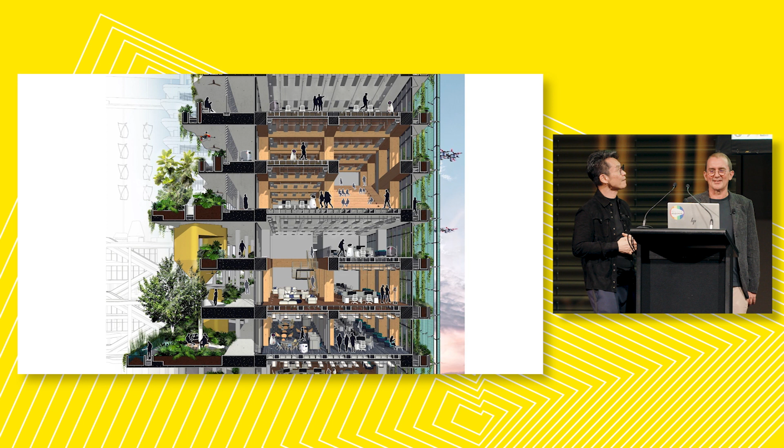And then another running track. Running track on top, yes. We're very fond of running tracks through buildings.

And I think the last few slides - this is the very last one. This one is happening, this one is finishing. Okay, but this also has a sad story. 10 years back, we took part in a new town development in Singapore for 250,000 residents, and we were able to demonstrate that we could be a zero energy new town. But when we got the feedback, again, we overshot it - they were not so keen on doing a zero energy new town, but they were more interested in a livable environment for it. Not that we didn't create a livable environment, it was a very livable environment.

Yes, like all architects, we are quite sore about the things that we did not achieve. But the good thing is that we persevered, and we were able to realize this development in Singapore, which is the PDD, a combination of Singapore Institute of Technology and JTC's Business Park on the northeast quarter of Singapore. And this is a very forward-thinking, self-sufficient typology where we were able to look at the future of mobility and realize some of these ideas that would be set in the decades to come.

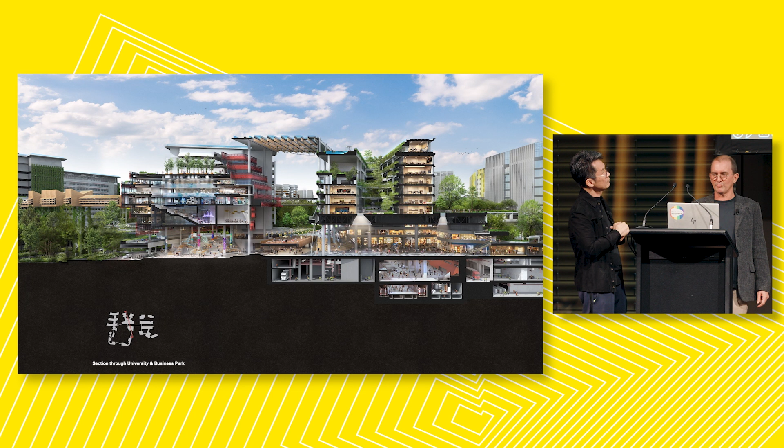Yeah, so it's a very complicated project in some ways, because it has new concepts of logistics and transport. So it's a totally car-free zone within the whole development. It has an enormous bus terminus inside it, as well as an MRT rail system coming in. The logistics is all driverless, delivering to the various components.

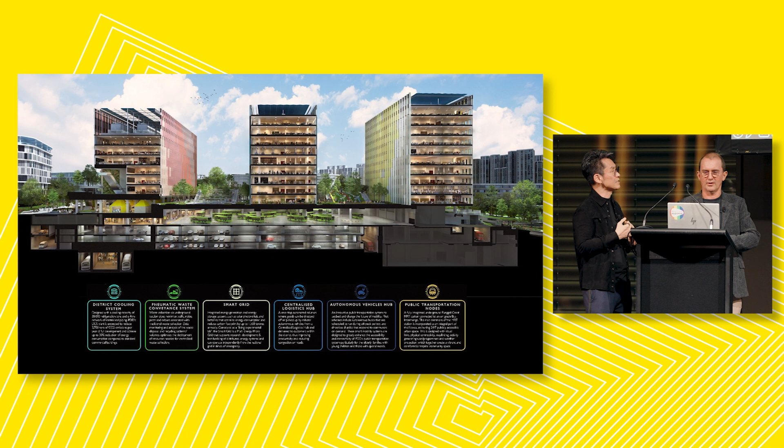And also an autonomous vehicle hub. In the future, cars will be mostly on-demand and autonomous. The facility here provides the parking for it. And it's also, like Richard mentioned, the logistics will all be robotic and autonomous. This is a space above the metro.

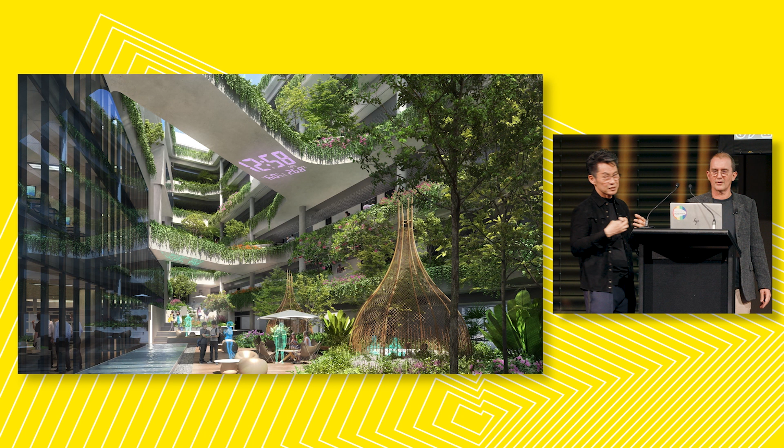This is the forum for the university that is connected to the business park. And what is interesting is that we looped it around at the 5th level to have a collaboration loop, and there is also interchange of spaces between the university and the business park, so that's more collaboration.

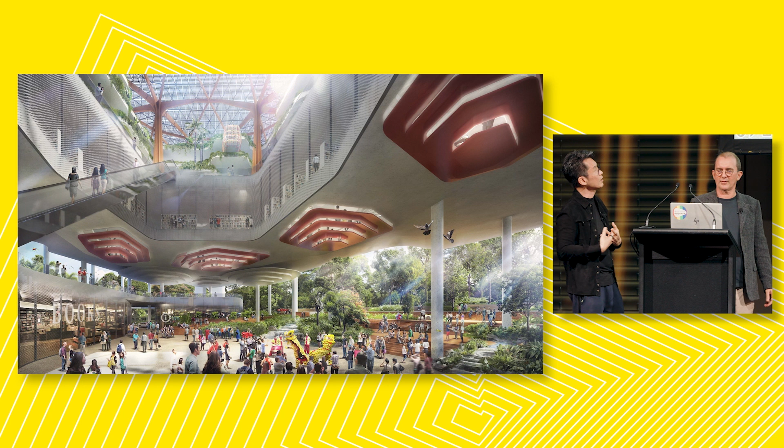But what's really important for us, we were able to retain something like 4 hectares of natural greenery, and we were able to cocoon the space and create it as a community park from the day it's actually finished. And above that, the JTC, the business park, and the university are committed to testing out farming, and also farming under the solar canopy.

And I think this is... and that's a bit of an example of where we enabled it. We knew they should be doing this, we put it in. They took it all out. Then so many years passed, the policy changed. They're going, where can we do this urban farming? And where can the PV go? And we were going, well, funny you should mention that, because we proposed it to you. And so it's been reactivated before the project finishes, which is really nice.

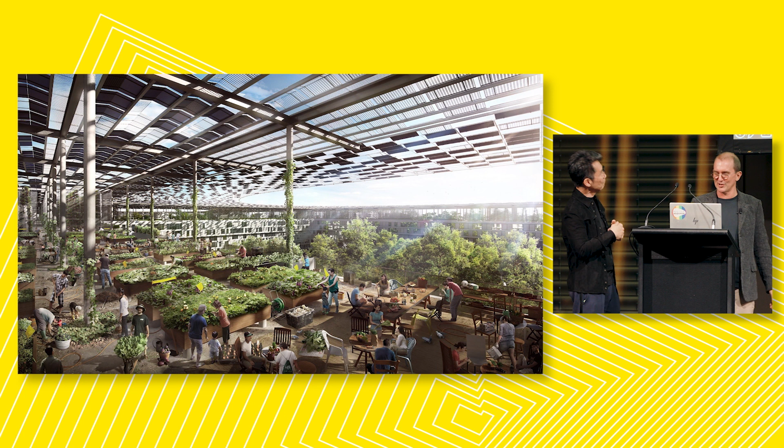And this was our concept for the overall master plan - the solar canopy is one of the key drivers of the district.

Our motto is no photon is wasted—that every photon from the sun should land on PV or plants, or come in through a window and delight the human beings. There shouldn't be any turning into heat. So that's the end of our talk. Thank you very much.